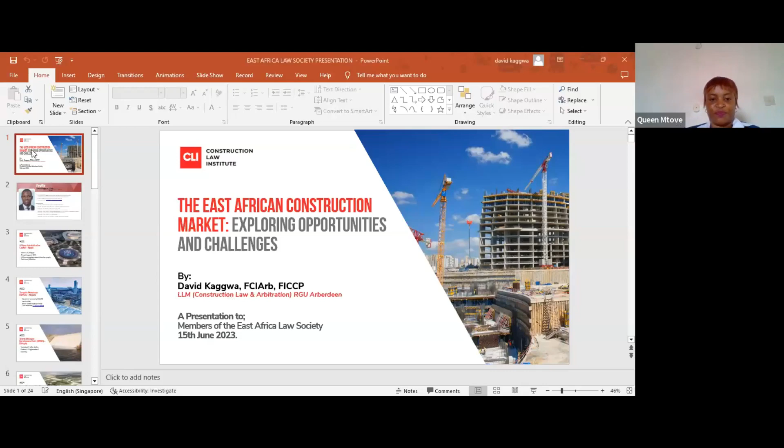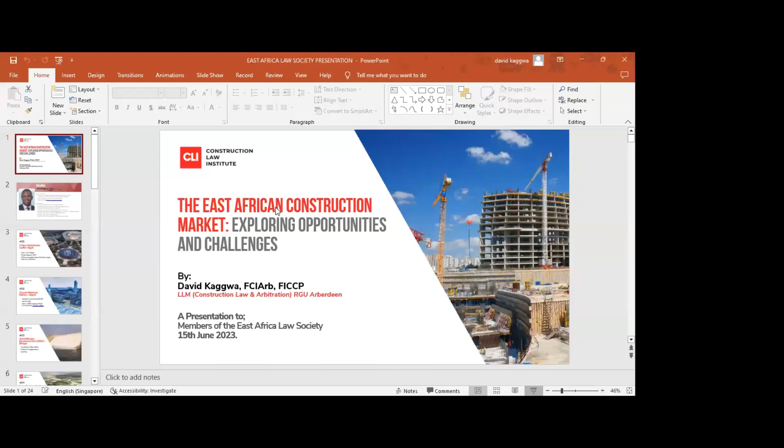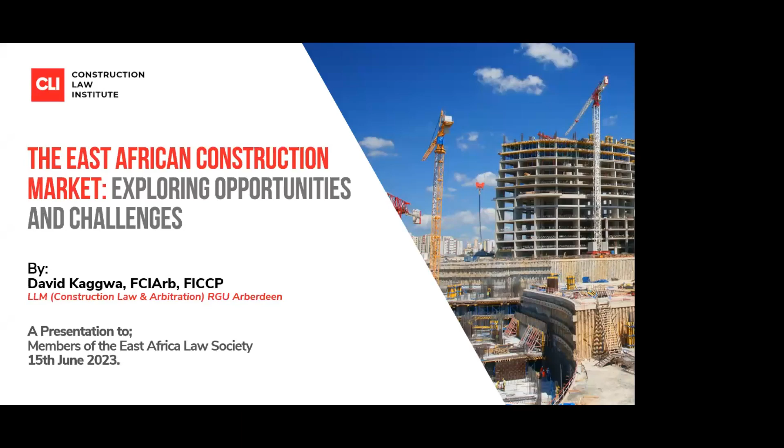So I'm going to start off my presentation, straight to the point. The topic is the East African construction market, exploring opportunities and challenges. All I need to tell you, members, is that the business of construction is not just in East Africa, the opportunities are Africa-wide. In East Africa, of course, there are opportunities, some of which we know, like in Tanzania there's going to be the standard gauge railway, and in Uganda there's also going to be a standard gauge railway. But we should not restrict our practices to only what is happening in East Africa, because we have the capacity to do business in the rest of Africa, even the rest of the world, for as long as you have the competence. So I'll go straight to the projects that we need to look at, and my senior colleague, Mr. Swanya, will look at the opportunities. I'm just going to look at the projects.

Not far away in Egypt, there is a new administrative capital coming up, the Smart City in Egypt. The project began in 2015, it plans to accommodate 6.5 million people, and the total cost is $58 billion. You can imagine the amount of business that is just in Egypt now, even before the project is complete.

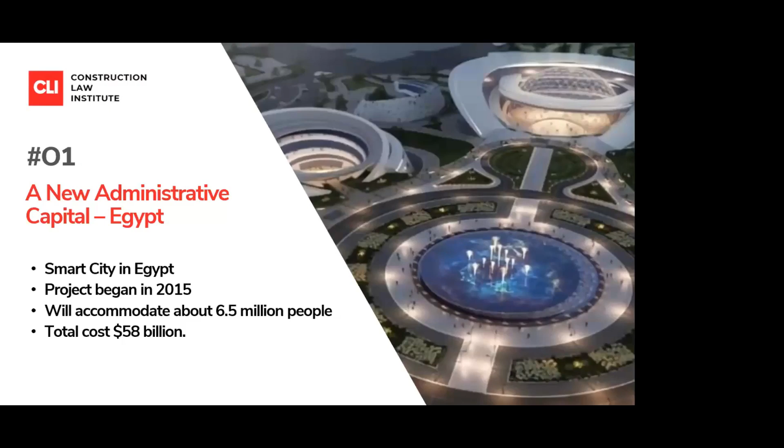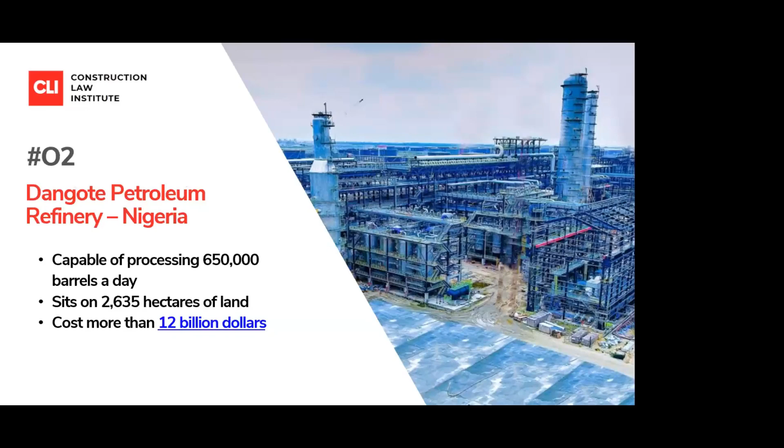There is the Dangote Petroleum Refinery in Nigeria, capable of processing 650,000 barrels a day of oil. It sits on 2,635 hectares of land, and it's going to cost more than $12 billion. This is a sign that there's a lot of capital coming into Africa, so we don't need to restrict ourselves to only what is happening in East Africa.

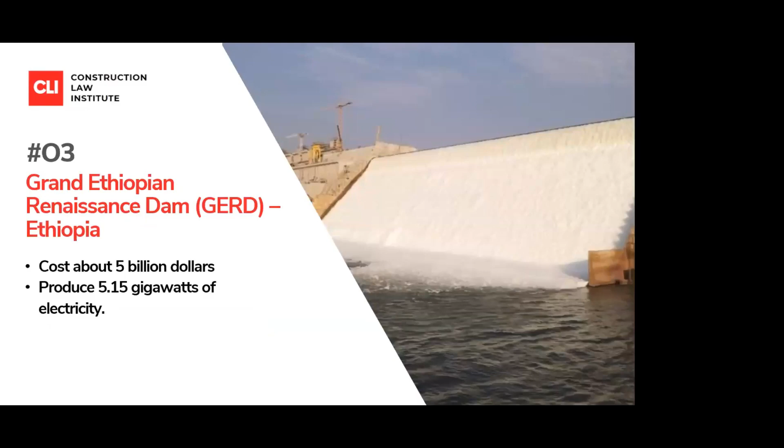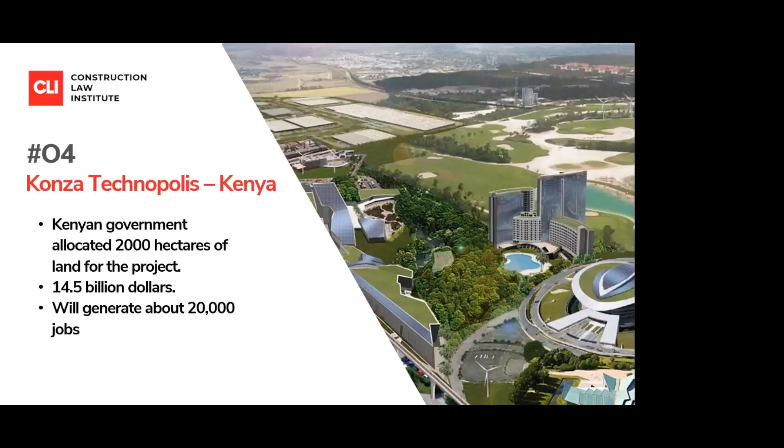There's the Grand Ethiopian Renaissance Dam in Ethiopia, total cost $5 billion, planned to produce 5.15 gigawatts of electricity. Right next door, the Kenya government allocated 2,000 hectares of land for the Konza Technopolis project in Kenya, costing $14.5 billion, planned to generate over 20,000 jobs.

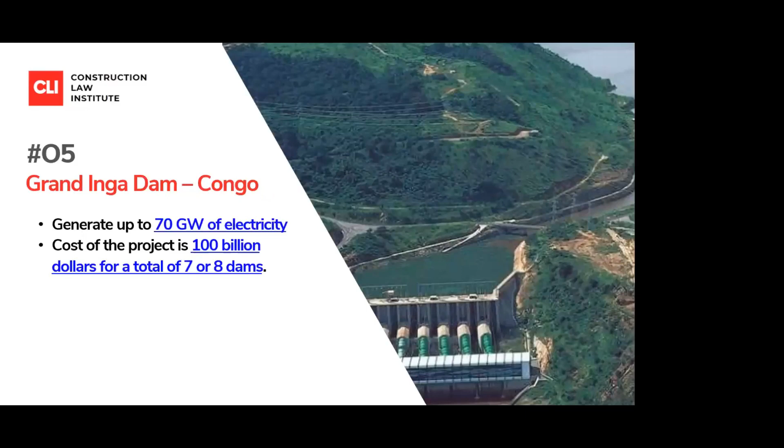There's the Grand Inga Dam in Congo, planned to generate 70 gigawatts of electricity, with a total cost of $100 billion for a total of 7 or 8 dams. As you may know, Congo applied to join the East African community, so it is something to look out for - it's virgin land for all of us.

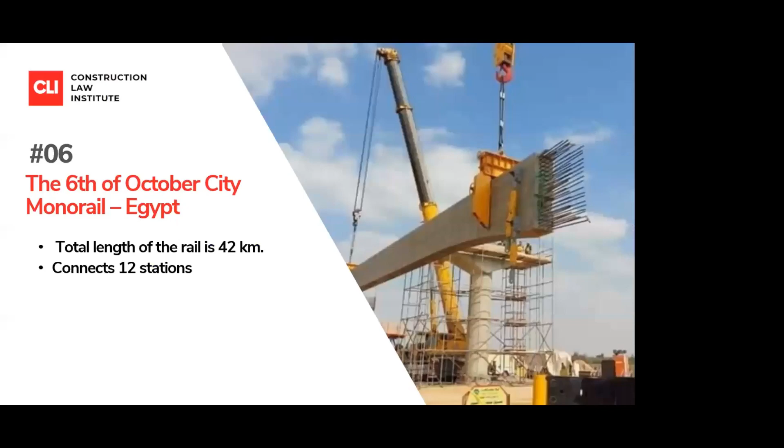The 6th of October City in Egypt has a rail of total length 42 kilometers, connecting 12 stations. The new administrative capital in Egypt has a 54 kilometer rail length, connecting 21 stations. In Nigeria, the seaport coming up is capable of handling vessels weighing up to 45,000 tons. The Lekki Deep Seaport has 3 terminals, a 1,200 meter long quay, 3 container berths, and a storage yard with 15,000 ground slots. So you realize there's going to be a demand for lawyers who have specialized in maritime law, as a lot of business is happening at sea.

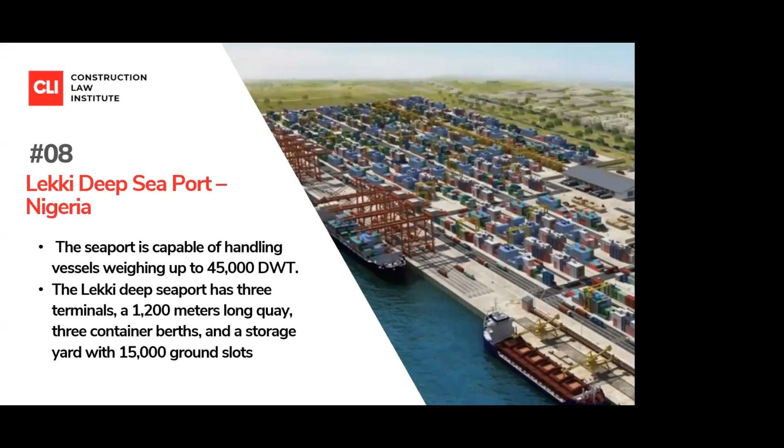There's a Greater Tortue Ahmeyim project in Senegal. Its production capacity will be 10 million tons of liquefied natural gas per year. So those in oil and gas, there's business in Senegal.

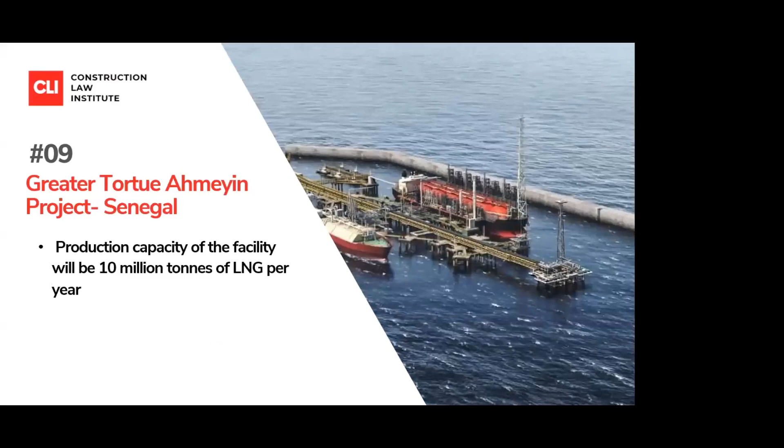The Suez Canal in Egypt have so far displayed already 3 projects in Egypt. The plan is to expand the southmost part of the canal from 30 kilometers to 70 kilometers, to be dredged, to increase the depth of the canal from 66 feet to 72 feet. As you're aware, FIDIC has already come up with a book on dredging. So those who practice construction law and know FIDIC, there's a lot of business in Egypt for this canal.

There is the Caculo Cabaça Dam in Angola. Its expected capacity is 2,175 megawatts. It's 103 meters high, 553 meters wide. It will cost $4.5 billion.

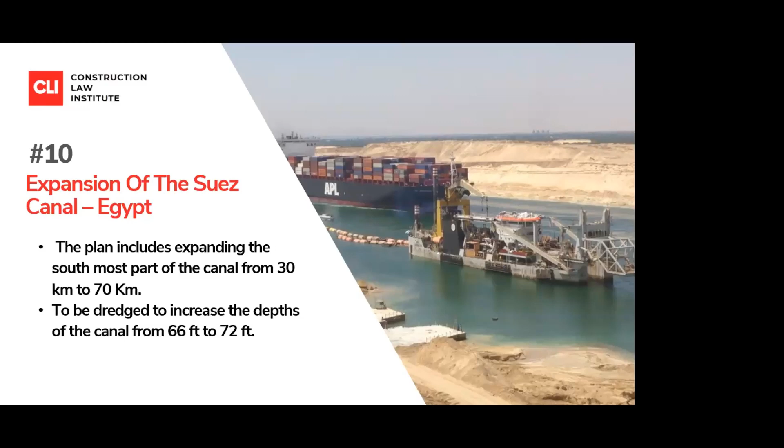The Ghana National Railway Project, $21.5 billion. The Redstone Solar Thermal Power Plant in South Africa, planned to generate 100 megawatts, which will cost $715 million. The Grand Theater of Rabat in Morocco, 55,000 square meters, performing arts in Rabat, it will cost $143 million.

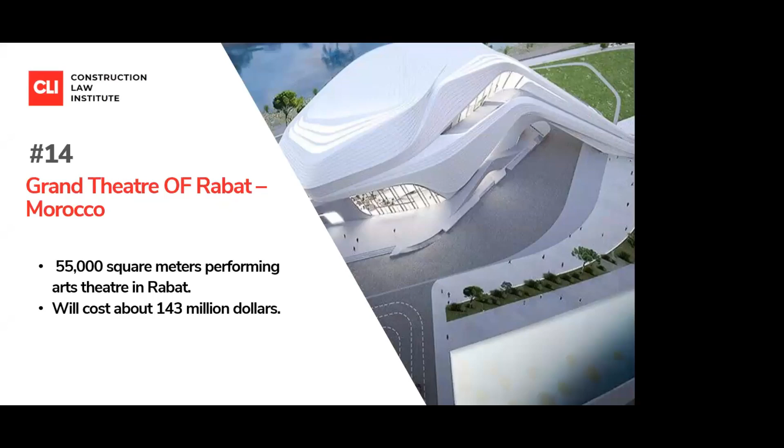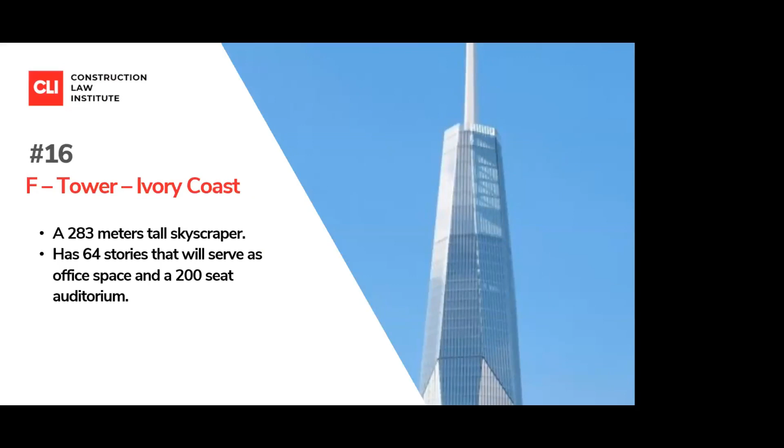The Kumasi Airport in Ghana, $75.23 million. It's an expansion. The F Tower in Ivory Coast, a 283 meter tall skyscraper, 64 stories, that will serve as office space, and a 200-seat auditorium. The Grand Egyptian Museum,

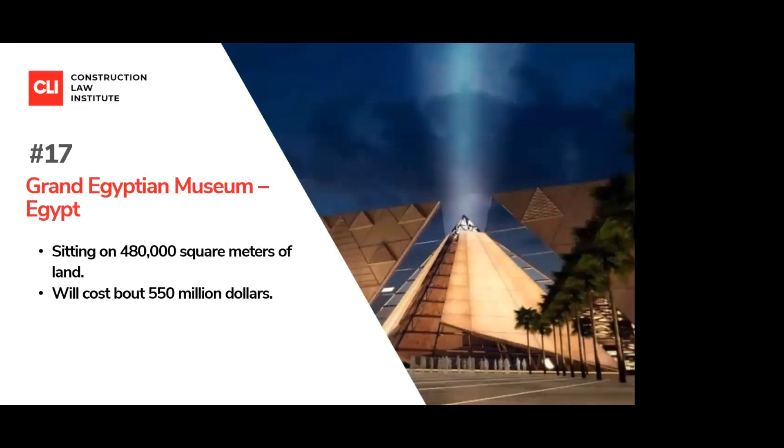480,000 square meters of land, to cost $550 million. The Kribi Deep Sea port in Cameroon, first phase of the project was completed in 2015. It's capable of carrying up to 1.5 million tons. So you realize that many of us had ignored maritime law.

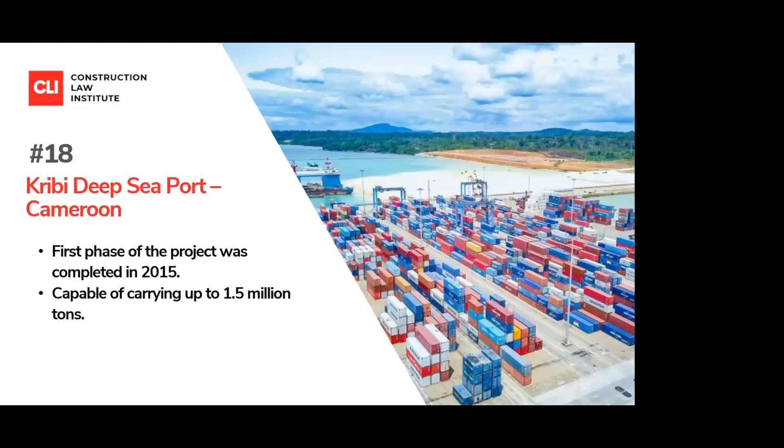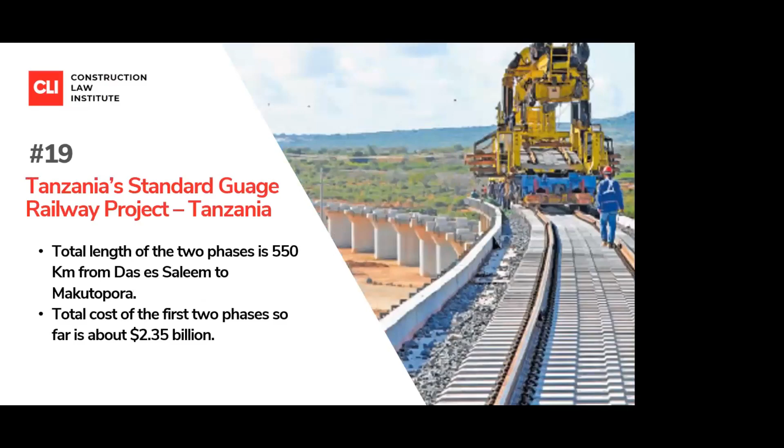It is time to go right there and see what's happening in Cameroon, Nigeria, Senegal. Then there's this Tanzanian standard gauge railway. Total cost of the first 2 phases is $2.35 billion. Then in Algeria, there is a $3.3 billion port coming up with a capacity of 25 million tons per year. The port will also handle up to 6.5 million containers per year in its 23 terminals.

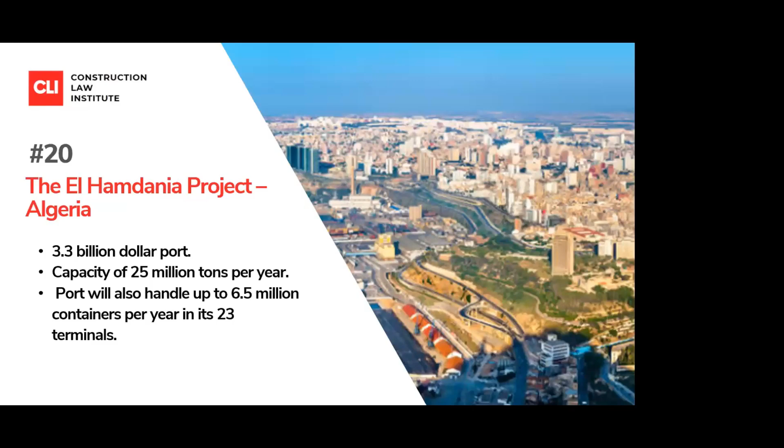So, having highlighted the projects happening all over Africa, the question we need to ask ourselves is, so what? And how do you go into that? My colleague, Mr. Swanya, will go into the detail of the opportunities. The only thing that I need to tell you for now is that the best way of strategizing yourself to be able to get onto these projects in Africa is you need to have competence.

So the number of institutions in Africa give you an opportunity, once you have the necessary training, to join there either as an arbitrator or a mediator or as an expert, to wait and see whether the business is going to come in, because most of these construction projects have arbitration clauses. So from what I have shown you, it shows that there's a lot of capital coming from all over the world to Africa.

So there's a focus on infrastructure development in Africa. So where capital flows, obviously disputes follow. And if disputes follow, then the next thing is, what is the forum for resolution of those disputes? All standard construction contracts that I have read have arbitration clauses.

Another principle is risk on unforeseeable physical conditions. There's another principle that also touches on construction methods and processes. We also have another principle on damages and compensation.

Now, having touched on those principles that are very important in construction, I decided to pick on them because when it comes to opportunities, when it comes to challenges, when it comes to how lawyers are going to explore and exploit the opportunities, you need to have the competences, you need to have the knowledge, you need to know construction law itself.

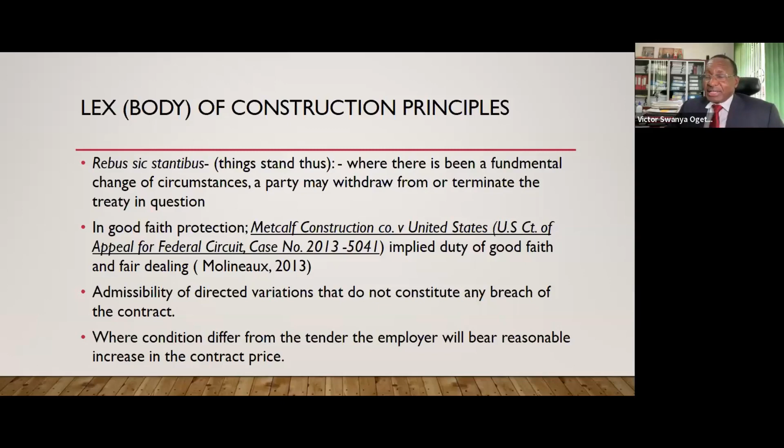And if I may bore a bit further, if you look at the projects going on in Africa per se, these are huge, complex projects. If a practitioner does not have knowledge of construction itself, its implications and technicalities, it becomes a challenge even to draft contracts or guide your client. Therefore it's important to take time and have knowledge on those principles.

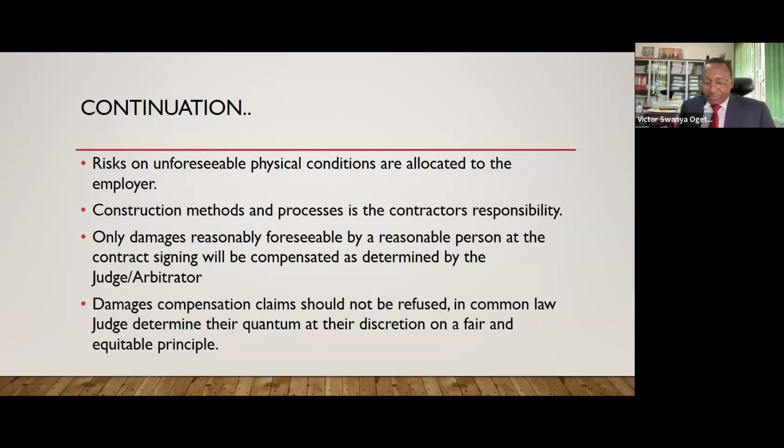So now we'll turn to the next slide, where I will talk more about the opportunities, and that is conveyancing. My colleague did mention about these huge projects that each country is actually doing.

In Kenya itself, we are already working on budgets to build an average of 500,000 house units per year, under the public sector. If you look at the amount of construction going through government, providing affordable housing which eventually will be offered to citizens to buy, you can imagine the amount of conveyancing work that exists in that. This is repeated not just at the national level, but also down to the counties.

Now, I believe equally many governments in the East African community are endeavoring to provide housing. I read some document, I think in Kampala, where a national scheme has started building affordable houses for its own people. So the construction of housing, whether at national level, county level, or through pensioners, provides huge opportunities for lawyers, mainly on issues to do with transfer of what has been purchased into ownership, and charging for those who want to seek loans. So there's a lot of work available for lawyers there.

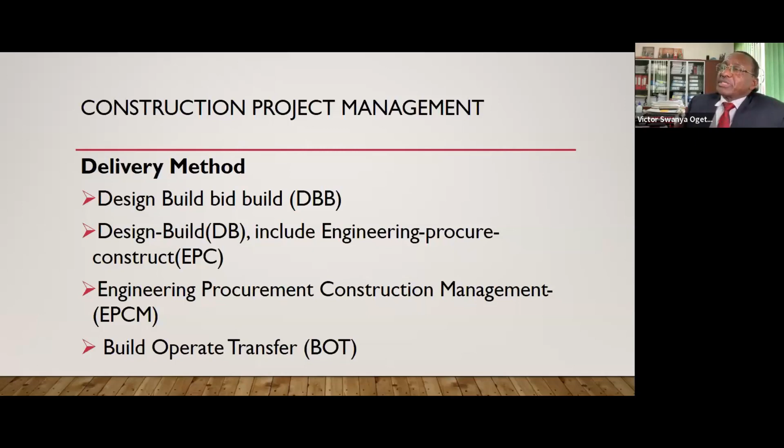The next point, which I think is a good opportunity here, is procurement reforms. Previously, before the procurement reforms, in most countries it was a bit difficult to control procurement. There was no proper standardized way of doing it.

But now with the reforms, it has brought in a standard way of monitoring and assessing procurement processes. That's a good opportunity because it brings up fairness, transparency, and accountability.

So with that, you find investors are interested. Why? Because procurement is more transparent than previously. You are able to compete transparently against each other without much bias.

So you have the Public Procurement Regulatory Board, which does that. You have the regulations and procedures, the issue of transparency and quality control, and the Public Procurement Administrative Review Board.

Just in case things have not worked properly, you still have a review board within that regime to deal with anything that has aggrieved a bidder. You also have procurement dispute resolutions, and of course, procedural tendering accountability.

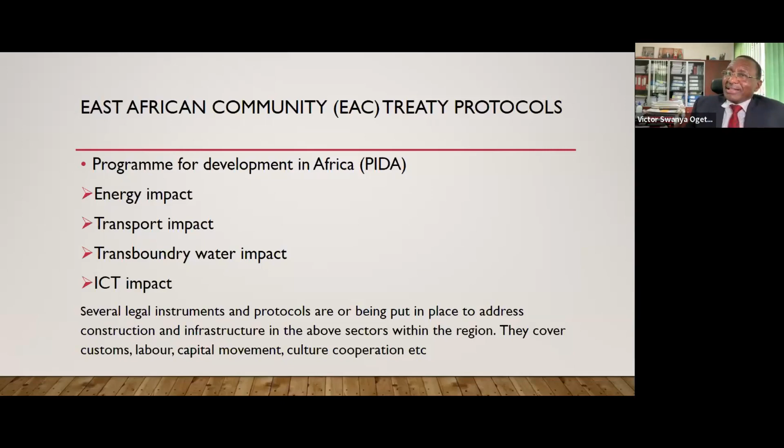How do lawyers explore in those areas? Currently, I think the lawyers rely on their local contacts to get work in those projects. But more than often, most of these projects are done by multinationals, so they're likely to tap into the international legal fraternity. But it's also possible that such agreements would look for local practitioners who they can join together with, so that they can provide services in the given project.

The other point, looking at it from the East Africa Law Society, is something that I think should be explored: how the society can pitch up or put up a legislative to the community itself, so that the practitioners within the respective areas of operation get some preference—maybe preference is the wrong word—but they become the first stop, so that before the international community is hired, we probably would get a chance given to the local practitioners, because I believe we have quite enough expertise in the respective areas who can offer reasonably good job.